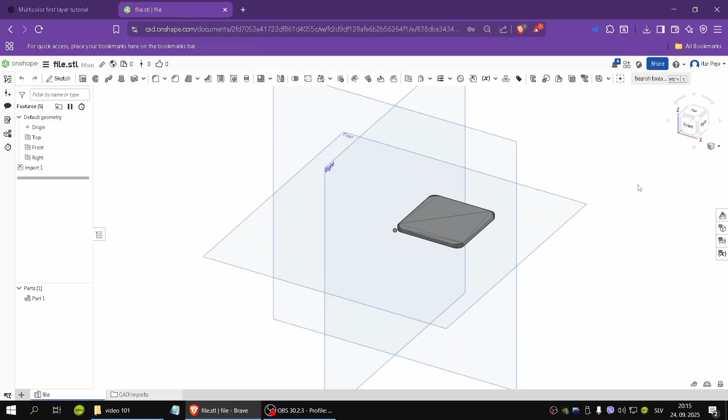First, find the 3D file you want to edit. Open it in Onshape and import the STL. When imported, click on the Transform icon and move the object so the plane touches the surface where you want to add your design.

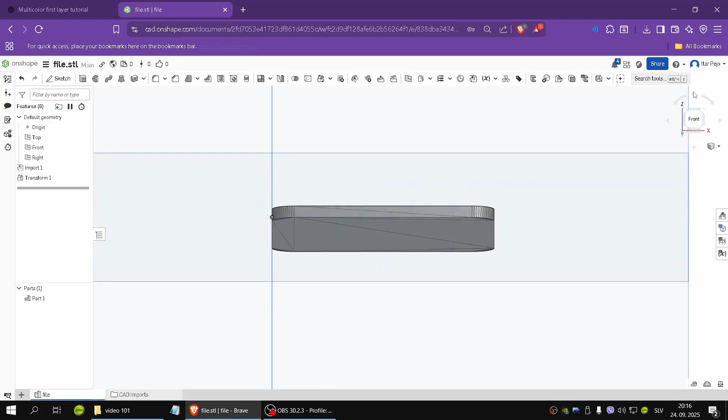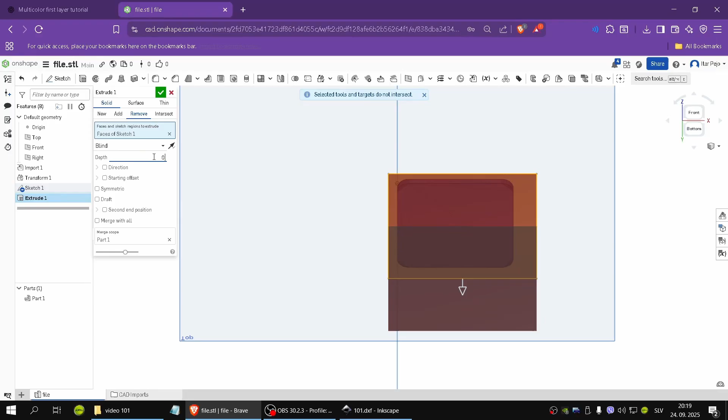Once your plane is aligned with the surface, go into Sketch. First, do an extrude cut of 0.18 millimeters from the object, then extrude it back by 0.18 millimeters and select Add in the section. This creates a slight recess that your DXF design can sit on and ensures a clean separation for multicolor printing.

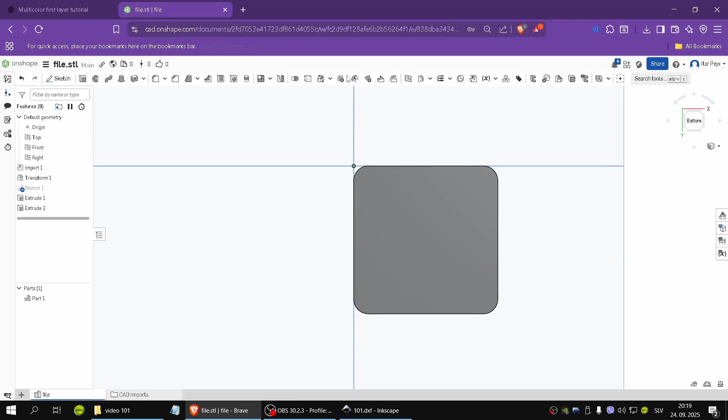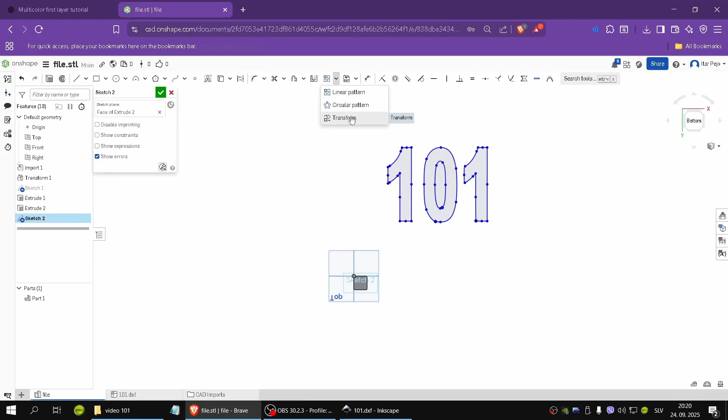Next, insert your DXF file. This could be text, a logo, or any design. Click Transform to scale, rotate, or position the sketch to fit your surface perfectly.

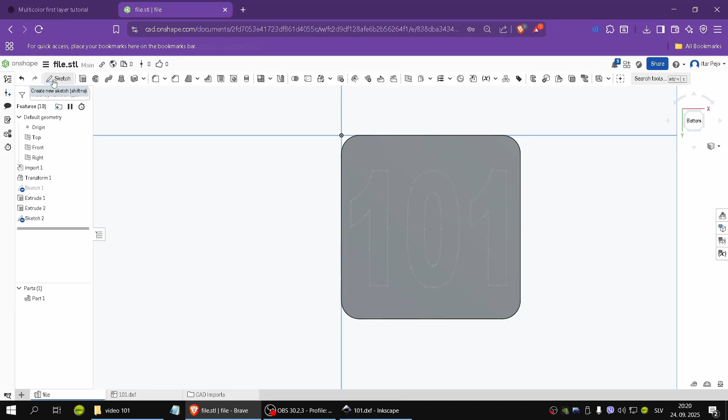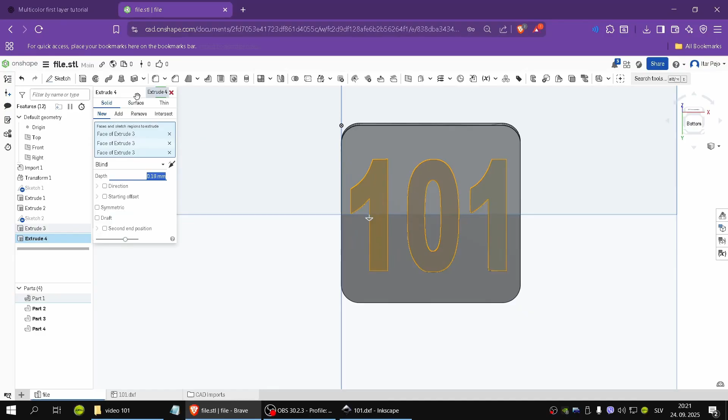Once positioned, do an extrude cut followed by extrude as new object from the cut section. Now you have two separate parts. For example, one for red and one for blue.

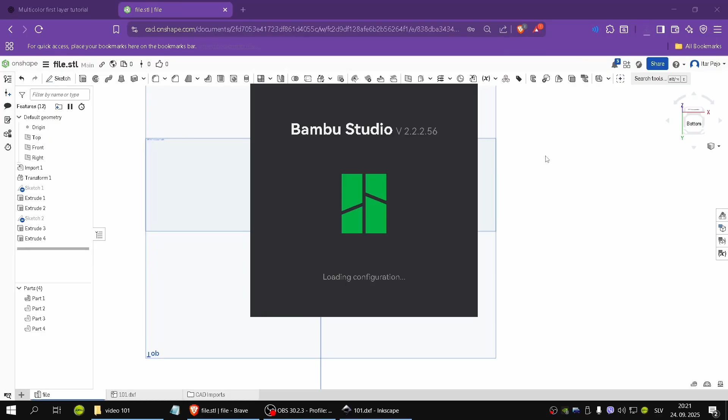Export the edited file as an STL. Open it in Bambu Studio. Before splitting the object, move it slightly away from the homing point. This prevents the printer from hitting the first layer of the first G-code.

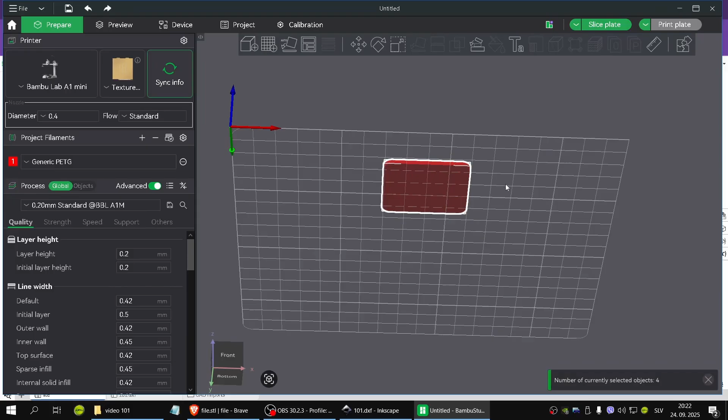Make sure your design doesn't have details smaller than your nozzle, in my case 0.4 millimeters. Lines thinner than that won't print properly. When the object position is set, split the object into two parts.

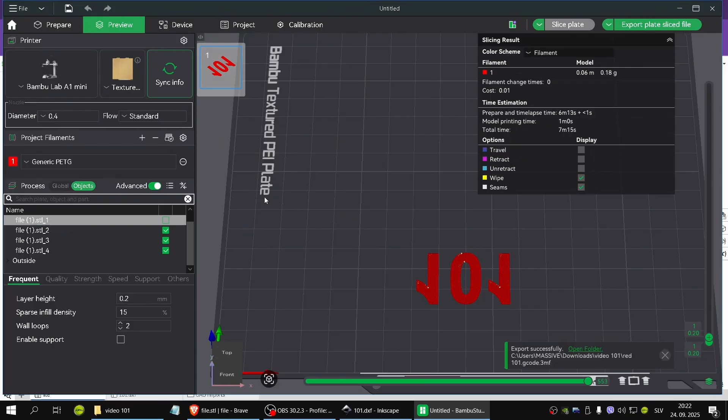First, uncheck the part that isn't the logo. Slice the logo alone and save it as something like red_logo.gcode. Then uncheck the logo and check the other part, slice it, and save as something like blue_part.gcode. Now you have two separate G-code files ready for multicolor printing.

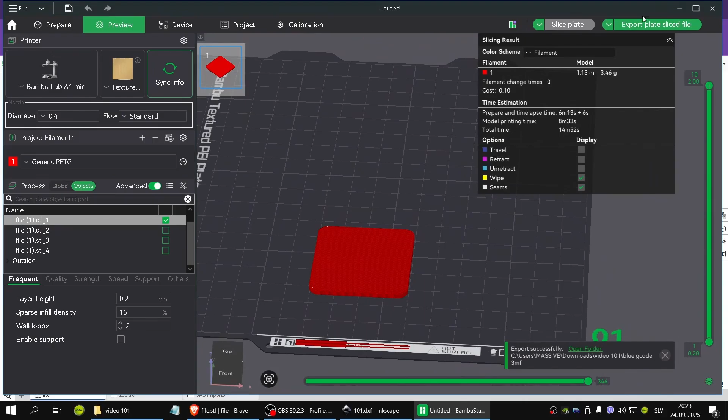Send the files to your printer. Start by printing the logo first. When it finishes, don't peel off the print, because the surrounding parts will print on top of it in the next step. Start the second G-code file for the rest of the model. Once it finishes, you'll have a clean multicolor first layer.

A crisp, multicolor first layer that really makes your print stand out. Remember, ensure your design lines are not thinner than your nozzle diameter. With this workflow, you can add logos, text, or other designs to any print. And that's it. You now know how to add multicolor first layers to your 3D prints using DXF files.